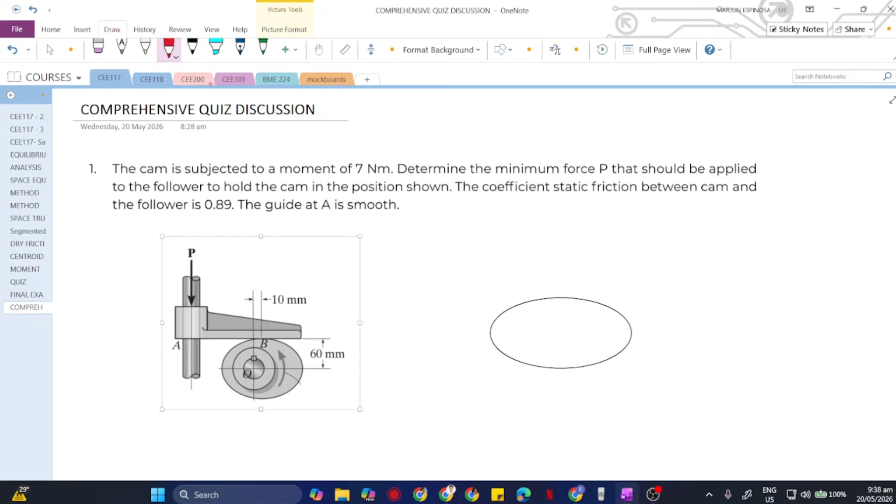So we need to solve for the value of the force P. To solve this problem, let's draw the free body diagram of the cam. So this is our rotating object, that is our cam. For example, this is our point O. Since our cam is moving in this direction, it has a moment of 7 Newton meter. So we have here our force FB, or our friction at B.

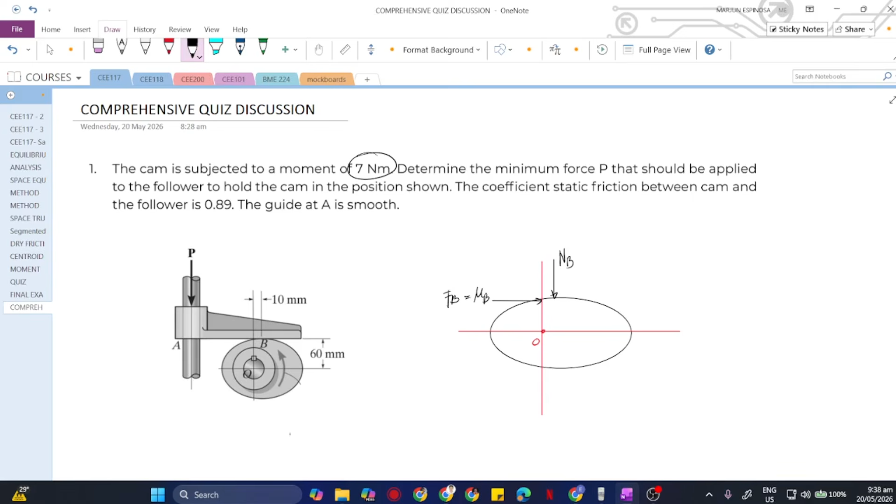Then at 10 mm, we also have our NB here. Our FB, considering we have a static coefficient of friction, that is basically mu B times NB, so that is our FB. And we also have here the 7 Newton meter.

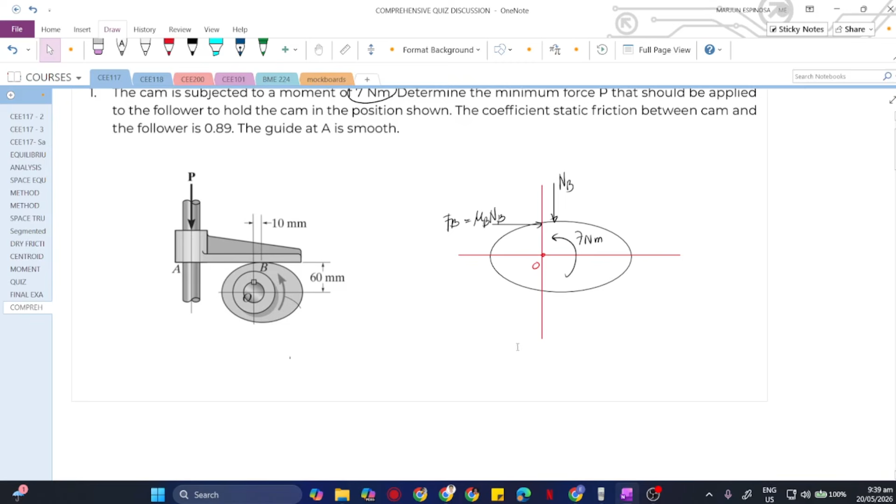So now we will take the moment at point O. We can sum up the moment at point O and equate that to 0, considering positive as counterclockwise. You can also make it clockwise if you want. So we have here 7 Newton meter.

This one right here, how much is it class? That is 10 mm. Then from here to here, that is 60 mm. So our NB will have a clockwise direction, and our FB will also have a clockwise direction, so both are negative.

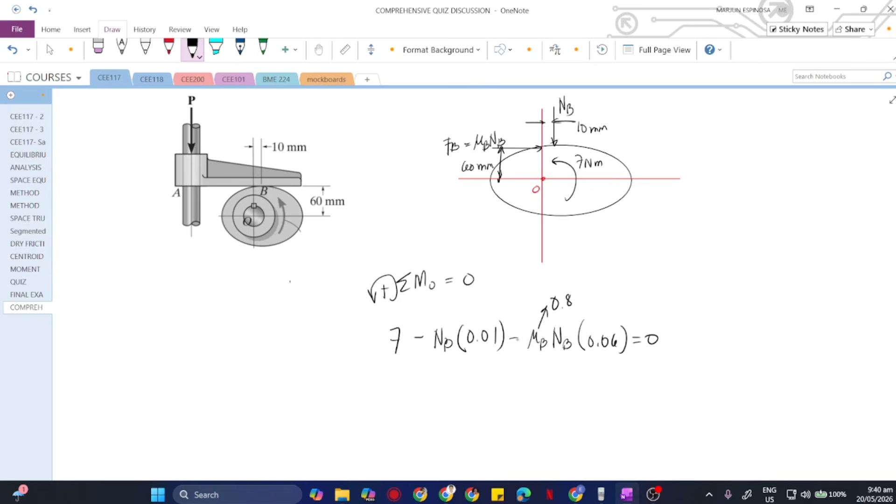Let's start with NB, that is at 10 mm, so 0.01 since this is in Newton meter. Minus our FB, which is mu B times NB, then multiply that by 0.06. Equate that to 0. Our mu B is already given as 0.89, so that's what we'll use.

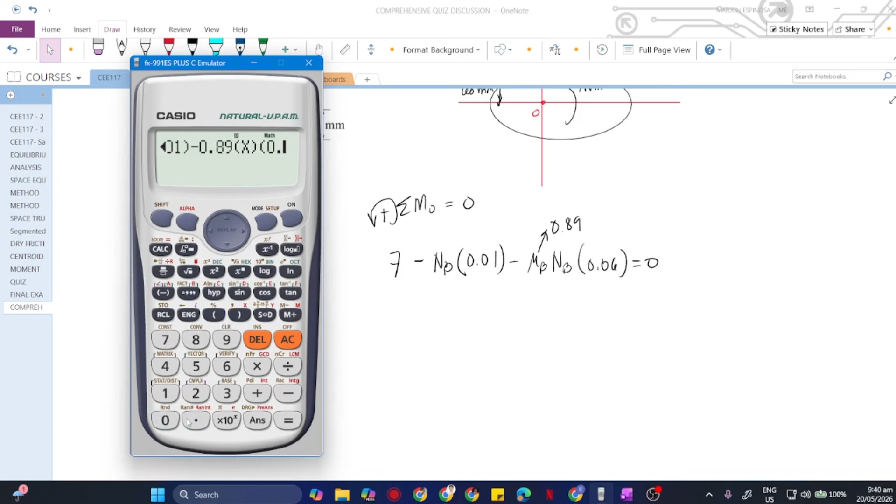Now we can get our NB. Let's use the calculator: 7 minus NB times 0.01, minus 0.89 times NB times 0.06, equal to 0. Shift solve, and we get our NB to be equivalent to 110.41 Newtons. So that is our NB, but what we need to solve is the value of our P.

If we take the free body diagram of the next component, this part right here, for example. Here is our NB, and here is our P. So we can simply use the summation of forces along Y, equate that to 0. So our P is just equivalent to our NB, which is 110.41 Newton. That is our answer for this problem.

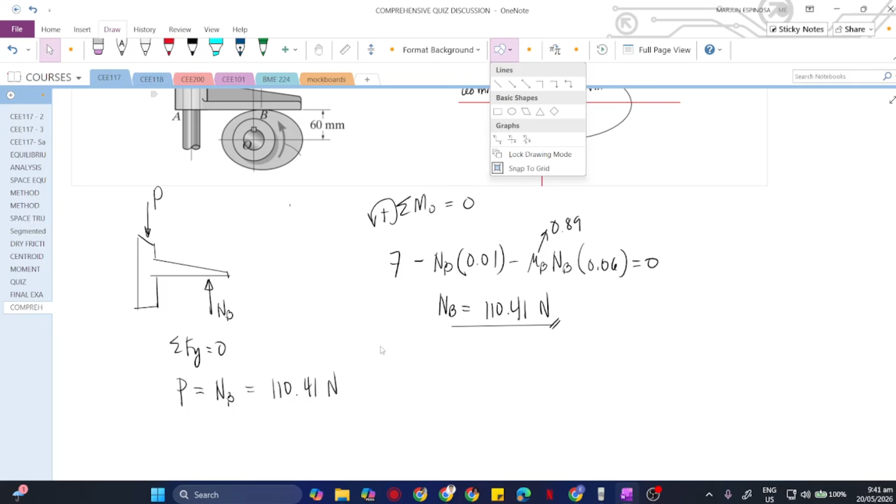Okay, that is our answer for that problem.

Now for our next problem, this one is a bit difficult. Refer to the cable below, and consider segment BC remains horizontal, and F is equivalent to 8 kN. So this part, this F here, is 8 kN. So we'll solve for the value of our P. How do we solve for that?

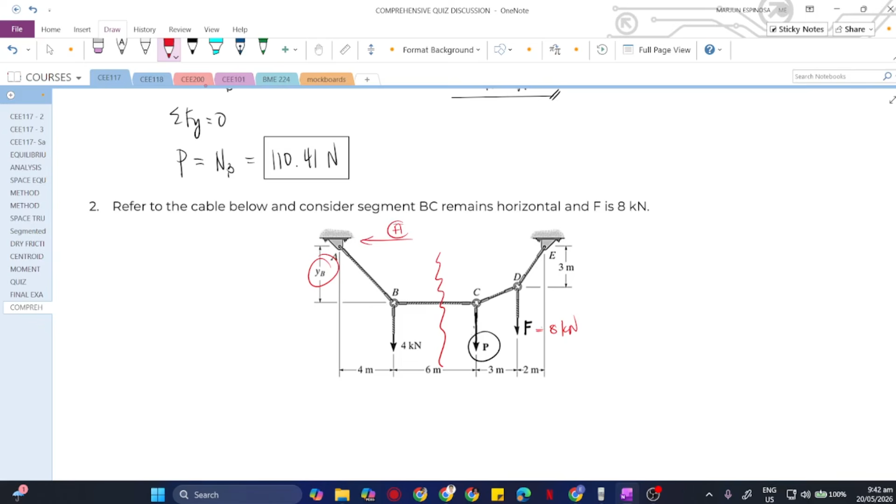We also have YB here, so later we'll try to solve that too. For our P, what we can do is cut our cable in this manner. So we have this part, let's say this is our section A, and this part here is our section B.

Now what we can do is take the individual moments. By the way, here we have AX, here we have AY, this part we have EX, and this part we also have EY. So what we'll do now is solve for the value of P.

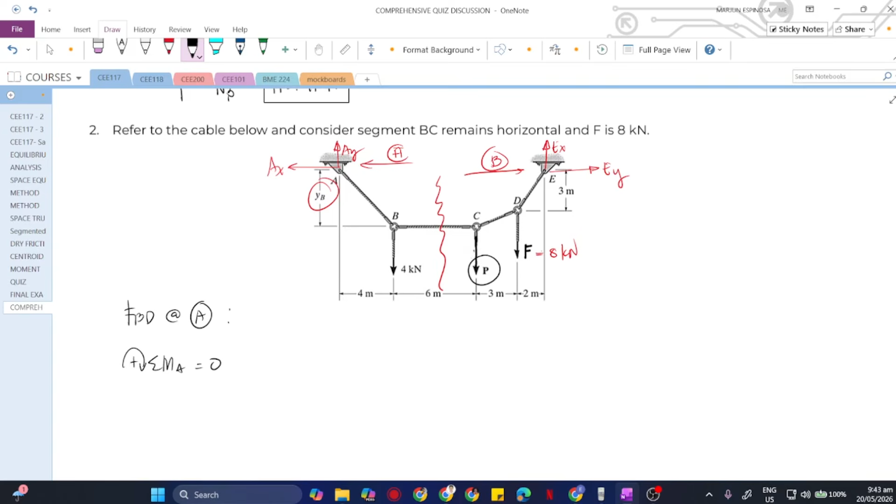To solve for the value of P, we go to the free body diagram, FBD at A. We'll sum up the moment at point A, equate that to 0. So what is the moment at A? At point B, which is 4 kilonewton. And take note class, we have BC here.

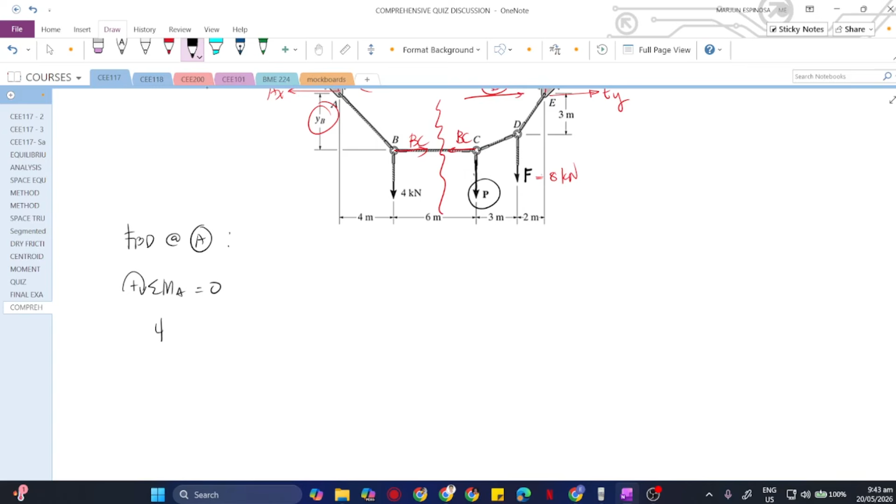And on this part too, we also have BC. So this becomes 4, and that is positive since it's clockwise, that is 4 from point A. And then we have BC.

And yung BC naman, negative. Tama, negative yung magiging direction niya, BC. And then yung perpendicular distance niya to point A is equivalent to YB. Equate that to 0. So basically, yung BC, YB natin, transpose natin sa kabila. Yung BC, YB natin is equivalent to 16. So this is our first equation.

Now, using FBD at B, what we can do is to still sum up the moment at point E. This time, sabihin natin counterclockwise is positive. Equate that to 0. Pwede lang din clockwise, no? Kasi mas convenient kung counterclockwise kasi itong E nandito na part.

So ano lang yung may moment, itong 8 kilonewton, positive yan, counterclockwise. So 8 multiplied by the distance from point E, that is 2. Also yung P na pinapahanap natin, P, and then the distance from point E, that is 5. And then you have also BC, BC will have a clockwise direction, so negative BC.

And that is equivalent to, ilan to class? Similar lang din, that is YB. Equivalent to 0. And then transpose natin ito sa kabila. Unahin na natin yan, BC, YB equivalent to 8 times 2, which is 16, plus 5P. And now, this is our second equation.

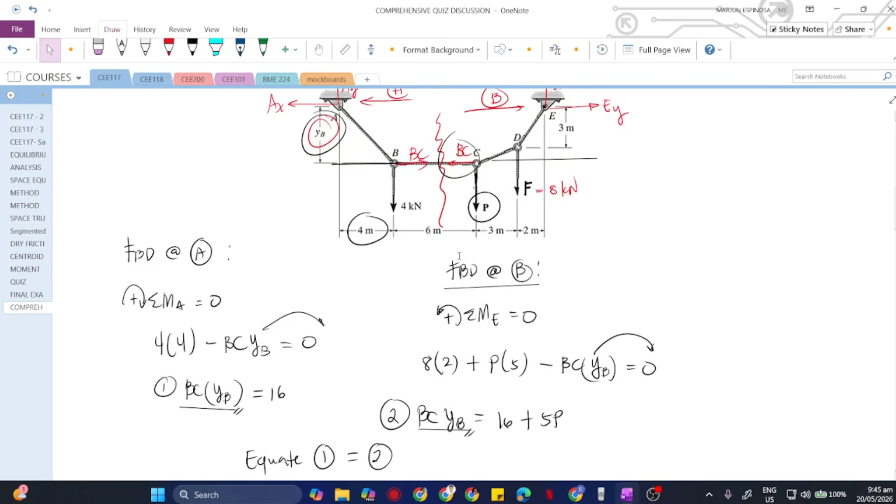Okay, kasi iniba ko yung given. Pero sa original, meron yung value ng P, ha? But that depends on the value here, yung F na binigay dito. Since nagkataon na they are just equal, so mean to say, yung P natin will have no force. That is P equals 0 kilonewton. Sabihin natin, solve natin yung, okay?

Pero ang tanong dito is determine itong P at saka yung YB, no? So solve natin itong YB na to. Okay, sandali lang class.

Okay, to solve for the value ng itong YB o sag natin dito sa point B natin class, we need to consider the entire FBD. For FBD of the entire diagram, meaning to say, itong part na to, kunin natin yung value nitong AX, AY, tsaka EX, EY.

So una, pwede natin gawin, we can sum up the moment at point A, so para yung AX, AY will have 0 moment here. Considering clockwise is positive. So ano lang yung may moment dito? 4 kilonewton, that is 4, okay, for yung perpendicular distance niya galing sa point A.

So meron din tayong considering the entire, ha. So meaning to say wala na itong BC kasi we are considering the entire diagram. So P, because 0 man yan, so 0 times 10, which is our perpendicular distance, is equivalent pa rin sa 0. So F, which is 8 kilonewton from A, that is 3 plus 6, 9 plus 4, that is 13. So 8, no, plus 8 times 13.

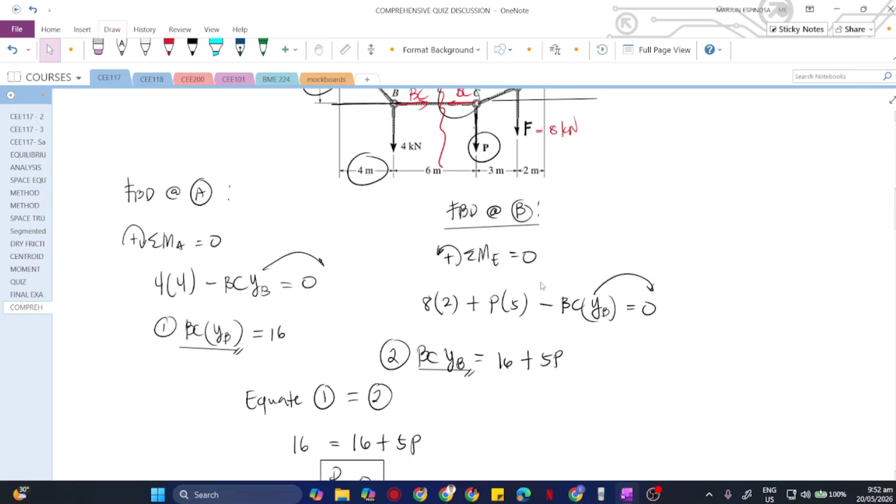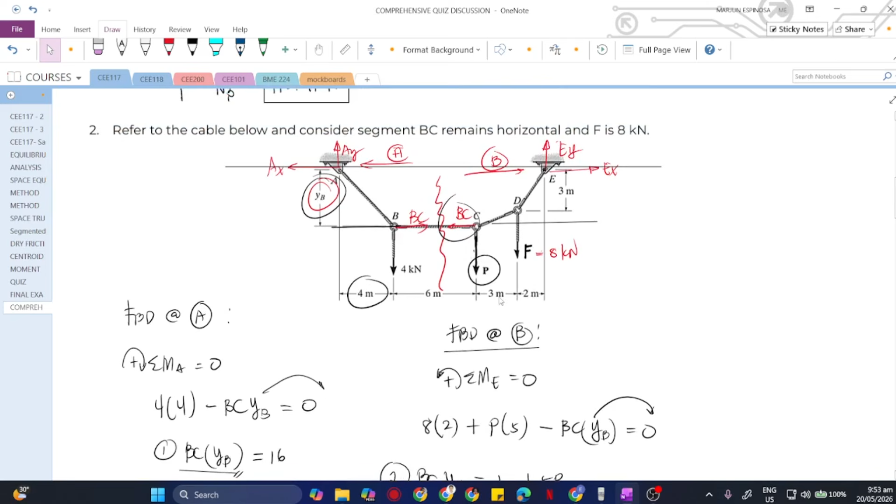And that is counterclockwise, kaya magiging negative EY. And then yung perpendicular distance niya galing sa A would be 4 plus 6, 10, 3 plus 2, 5. So 10 plus 5, that is 15. Equate that to 0.

So transpose natin to. Masasolve natin yung EY, which is equivalent to, kuha natin yung calculator natin. So that is about 4 times 4 plus 8 times 13, and that is to be divided by 15. So yung sagot dito is 8. Yung EY natin is 8 kilonewton pala. And then, summation of forces along Y for the entire FBD pa rin yan, ha.

So, meron tayong EY. Meron tayong 4 kilonewton na negative, pababa, itong part na to. So, 4 kilonewton, we also have 8 kilonewton. Itong EY pataas yan. 8, then A minus 4, minus 8. Then we have here positive AY, equivalent to 0. Ito, makansel lang yan. So therefore, yung AY natin is also equivalent to 4 kilonewton. So yan yung values ng ating EY at saka AY.

And then, solve natin yung value naman ng EX at saka AX. So pwede natin gawin, punta tayo sa joint E. We will consider joint E. So ano yun sa joint E dyan?

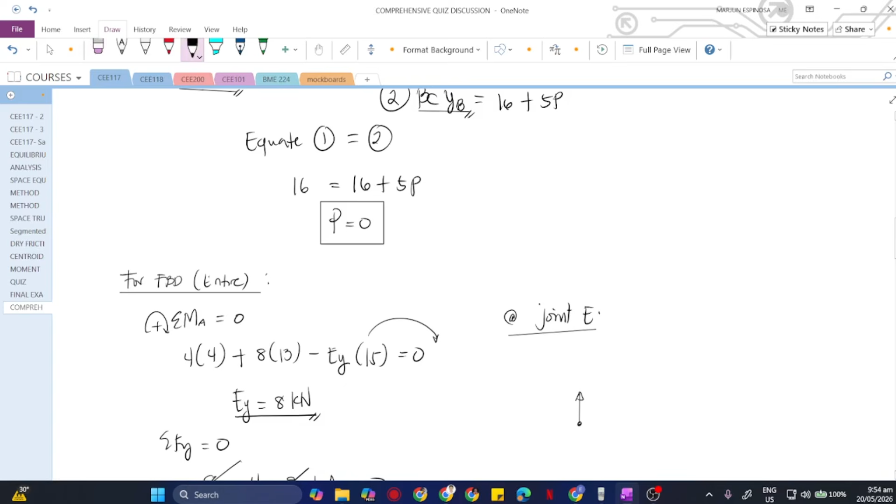Meron tayong EY, which is equivalent to 8 kilonewtons. So ito, EX, yung kinukuha natin dito. And meron din tayo ditong DE or ED, pwede lang DE. And also itong angle na to. Gawa tayo ng line, itong angle na to class. Angle, sabihin natin DE. Okay, ano yung angle DE na yan?

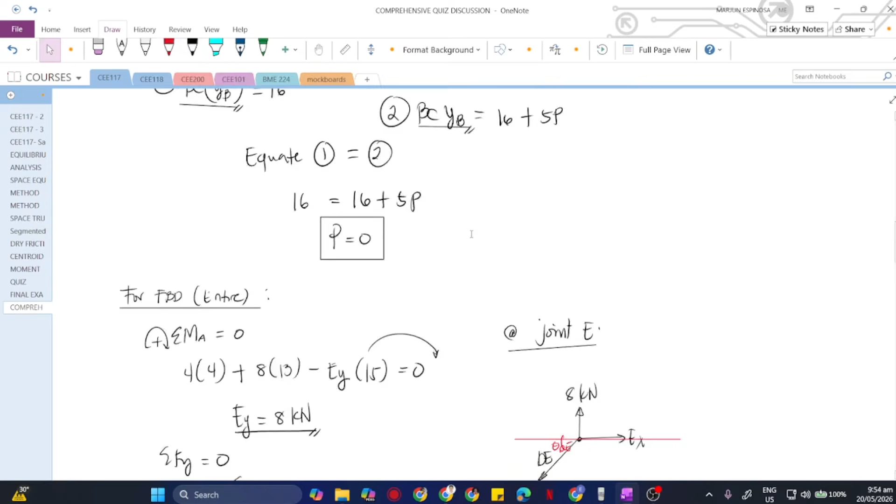So meron tayo ditong parang triangle, no? Ganito, so kunin natin itong angle na to. Considering this one is 2 meters, itong part na to 2 meters, and itong part na to is 3 meters. So makukuha natin yung angle natin. Yung angle DE natin equivalent to arctan of, yung opposite side niya is 3 all over 2. Yung opposite is 3, yung adjacent is 2. So makukuha natin yung angle theta of angle ED, that is inverse tan 3 over 2, or that is equivalent to 56.31. So yung angle DE natin is 56.31 degrees. Yan yung angle ED natin, or DE.

Now, since nakuha naman natin to, which is 56.31, makukuha na natin yung EX. So how to solve for that one? We can use summation of forces along Y, equate that to 0. Unahin natin yung Y. So we have here 8 kilonewtons minus DE, and that is sine of 56.31, equate that to 0. Transpose natin to, therefore we get DE sine of 56.31 equivalent to 8.

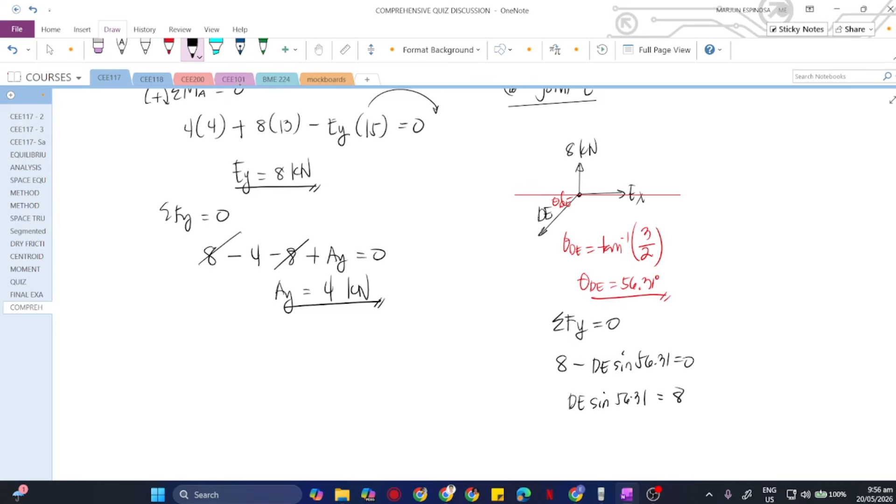Or simply we can divide by sine so we can solve for the value of DE. So ano yung value natin? 8 over sine of 56.31, and that would give us 9.61. DE is 9.61 kilonewton. Yan yung DE natin.

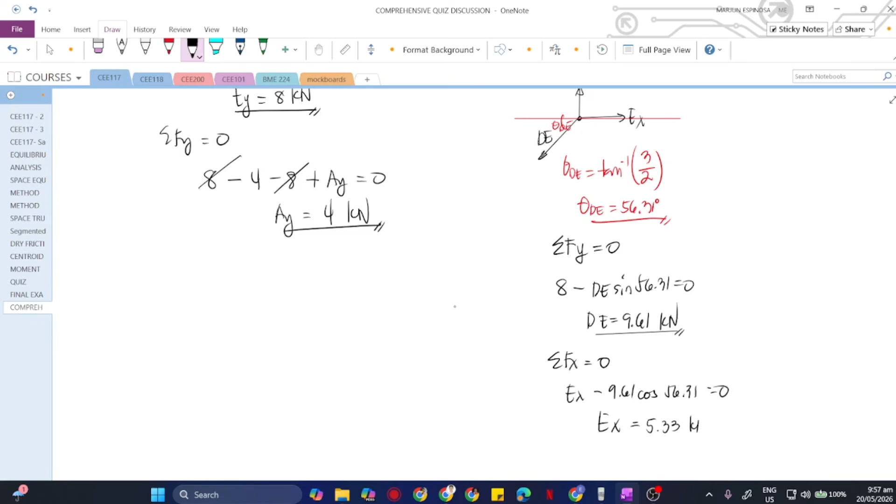Now, summation of forces along X, equate that to 0. Meron tayong EX minus ito, 9.61 our DE, then cosine of 56.31 equivalent to 0. Yung EX pala natin is equivalent to 9.61 cosine of 56.31, and that would give us 5.33. 5.33 kilonewton, yan yung EX natin. And then based on our diagram, yung EX natin at AX natin is just equal. Summation of forces along X for the entire diagram class, AX is equivalent to EX. So therefore, yung AX natin is also 5.33 kilonewton. Yan yung AX natin.

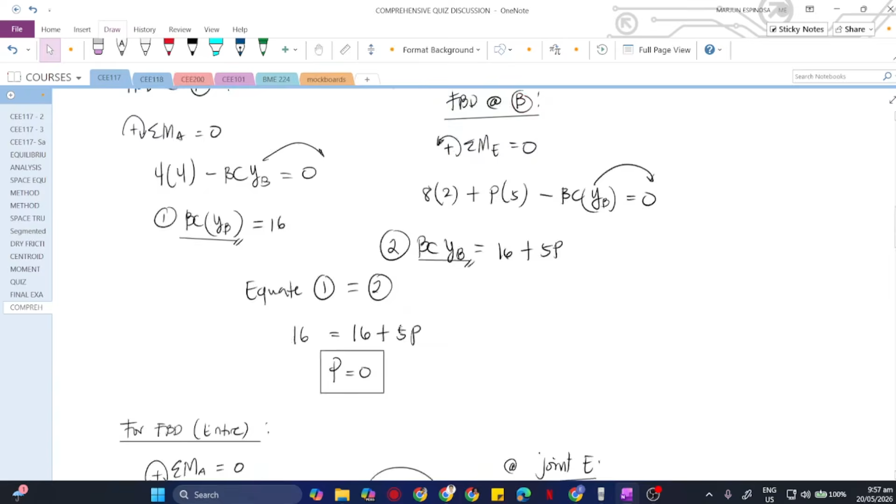Now since nakuha na natin yung AX natin, then meron na tayong AY, EX, then masasolve na natin yung YB natin. If we were be able to solve itong, need natin kukunin yung... sandali. Pwede natin gawin is gamitin natin tong to solve for YB.

Pwede natin gamitin tong section A. Tingnan natin, kung gagamitin natin itong part na to, section A, meron tayong AY, AX, meron tayong BX at saka 4. Unknown yung BX, pero based on this one, ay BX yung BC, masasolve natin yung BC to be equivalent to AX lang, based on this given. So yung AX at BX ay BC is just equal. Tama ba? Kasi summation of forces along X, BC minus AX, ang summation of forces along Y, AY tsaka 4 kilonewton. So yung BC pala natin is just equivalent to AX lang.

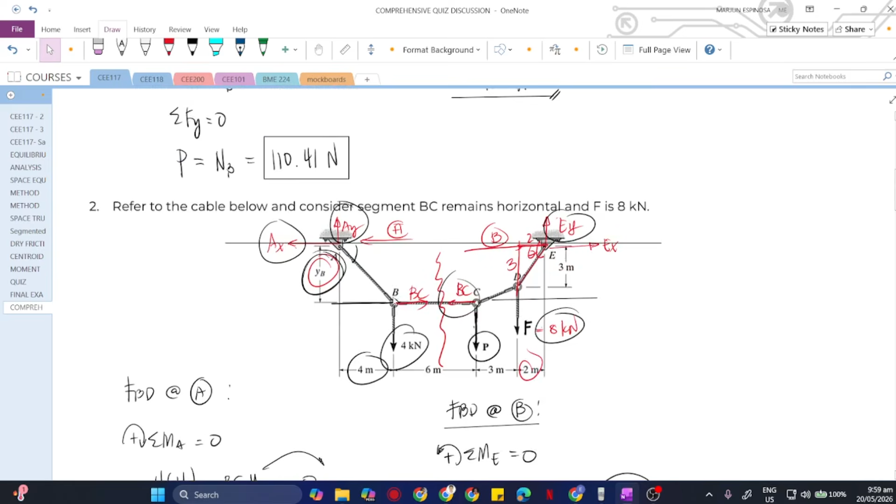Okay, so using FBD at A, summation of forces along X equate that to 0. So yung AX natin is equivalent lang sa BC. So BC pala natin is 5.33 kilonewton also. So yan yung gagamitin natin. So we will just be evaluating itong joint B.

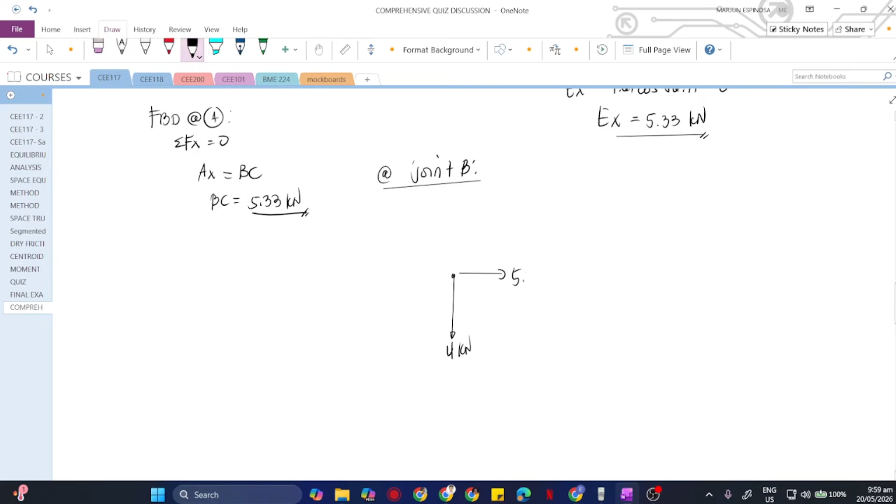At joint B, meron tayo ditong 4 kilonewton. So meron tayong joint B dito. So this is 4 kilonewton. Ito naman nakuha natin, which is 5.33. And then lastly is itong AB natin or BA. Ito yung BA natin.

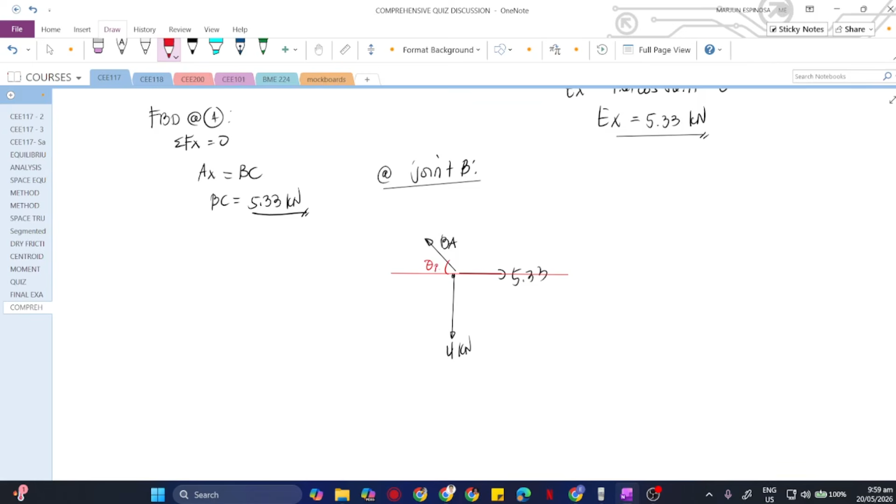At yung angle natin dyan, hindi natin yan alam. Hindi natin alam yung angle dito. Angle, sabihin natin BA. So we need to solve for angle BA para gamitin natin yung angle BA to solve for our YB. Kasi kung makuha natin yung angle AB natin, this one is equivalent to 4 based on our given. Ito, 4. Then makukuha na natin yung YB natin by using the tangent function. So, kukunin mo natin tong YB, angle AB natin. So we can just use the summation of forces along, let's say for example, X, equate that to 0. Or, unahin natin yung Y, equate that to 0.

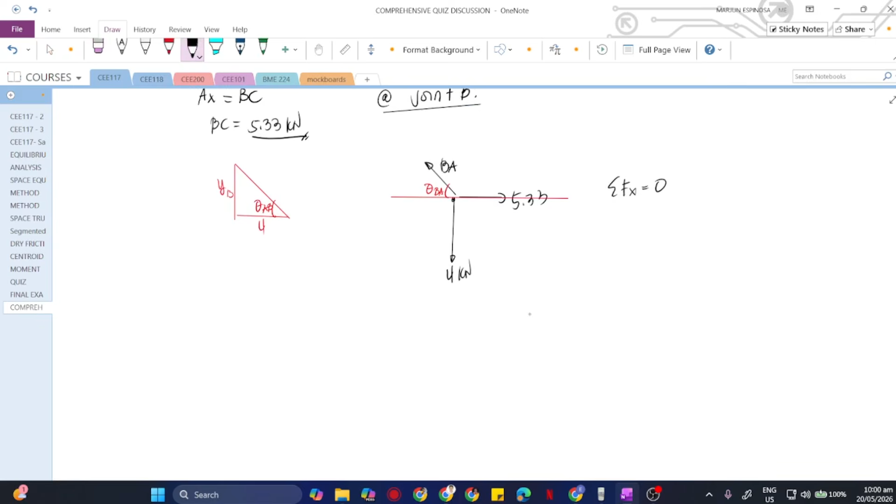So, BA, then that is sine of angle BA, minus 4, equate that to 0. Transpose the negative 4, it becomes positive 4. So this is our first equation.

Then summation of forces along X, equate that to 0. So let's start with 5.33 minus BA cosine of angle BA, equate that to 0. Transpose the negative BA, so it becomes positive BA cosine angle BA equivalent to 5.33. So this is our second equation.

Now by dividing the first equation by the second equation, we get BA sine angle BA equivalent to 4, all over BA cosine angle BA equivalent to 5.33. So the BA here will cancel out, and sin theta over cosine theta will be equivalent to tangent theta.

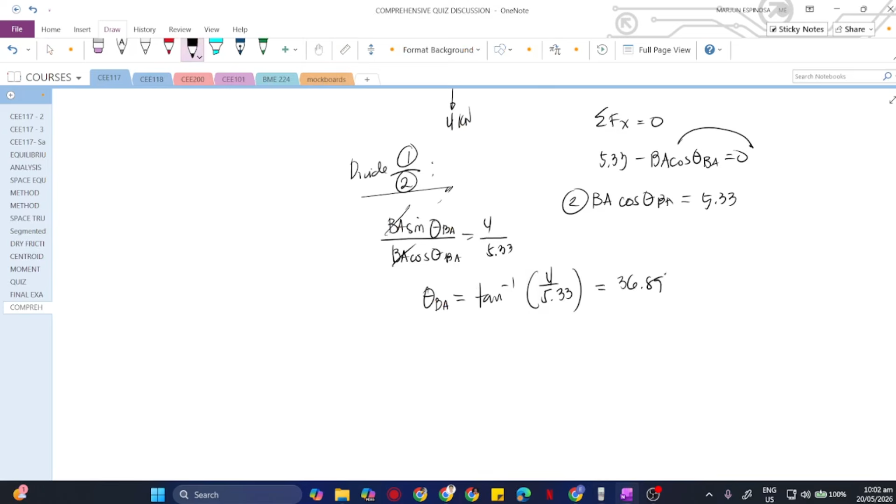Then angle BA will now be equivalent to arctan of 4 over 5.33. So we can get our angle BA. Arctan of 4 over 5.33, the answer is equivalent to 36.89. So that is our angle BA.

So once we get angle BA, we can now solve for our YB. Basically, tan of 36.89 is equivalent to the opposite, YB, over adjacent 4. So YB is equivalent to 4 tangent 36.89, which is simply 4 times tan of our answer, and that gives us approximately 3.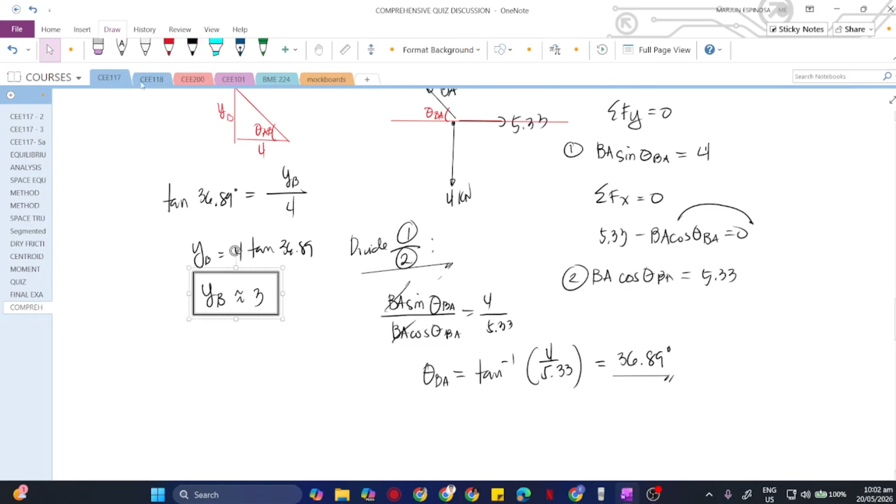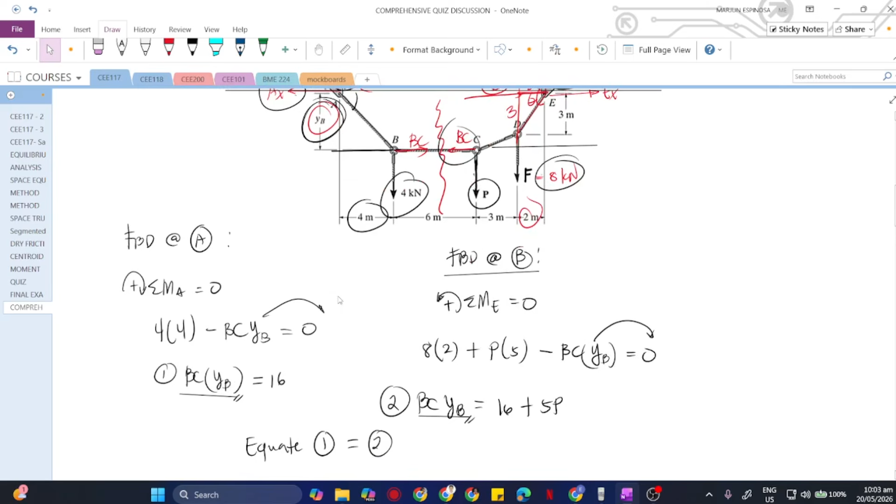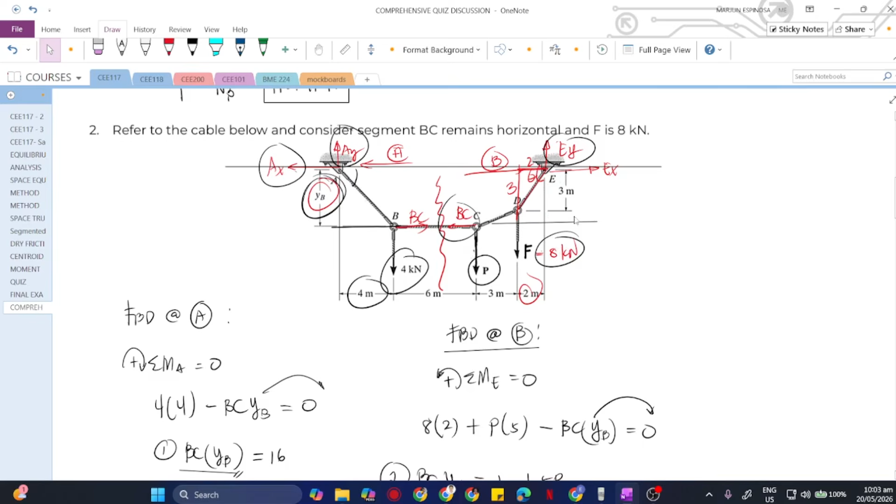So that's our answer for this problem. But it's not exactly 3, just approximately 3 based on the value we got, which is 3.001. So that's our answer for this problem. It just happens that it's similar here because we said F is equivalent to 8 kN, so the diagram turns out similar. But in case it's not 8 kN, there's a value of P, and then YB and this part would differ. But based on our example, we get similar values.

Now, for our third problem, let me check if I'm still recording. Okay, still recording. For our next problem, determine the moment of inertia of the cross-sectional area with respect to the x and y-axis. So we need to get I sub x and I sub y, which are the moments of inertia.

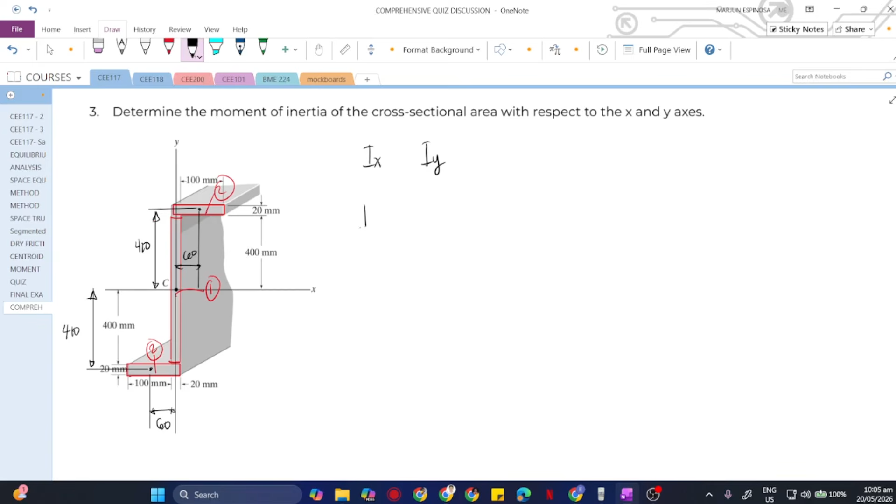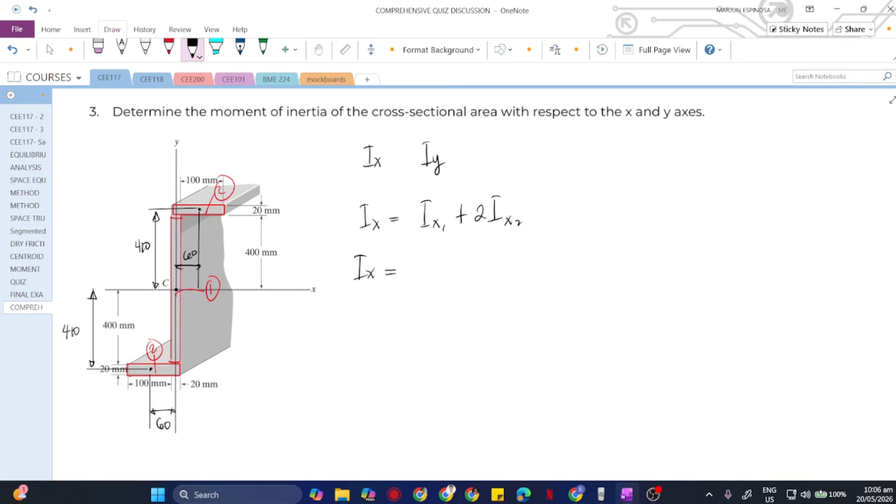Now let's start with I sub x. So I sub x is the summation of the moment of inertia of the first segment, plus the moment of inertia of the second segment. Since there are two of that segment, we multiply it by 2. So for the first segment, since the x and y axis is right at its centroid, the I sub x for a rectangle is just 1/12 bh cubed. We don't need the parallel axis theorem there since our centroid and the axis we're taking the moment about coincide. So that's just I sub x sub 1.

Now for I sub x sub 2, we'll use the parallel axis theorem. First, that's 1/12, class, 1/12.

1 over 12 BH cube - make sure you memorize the rectangle, the most simple and commonly used figure. Although the triangle and circle should also be memorized. 1 over 12 BH cube, this is 2.

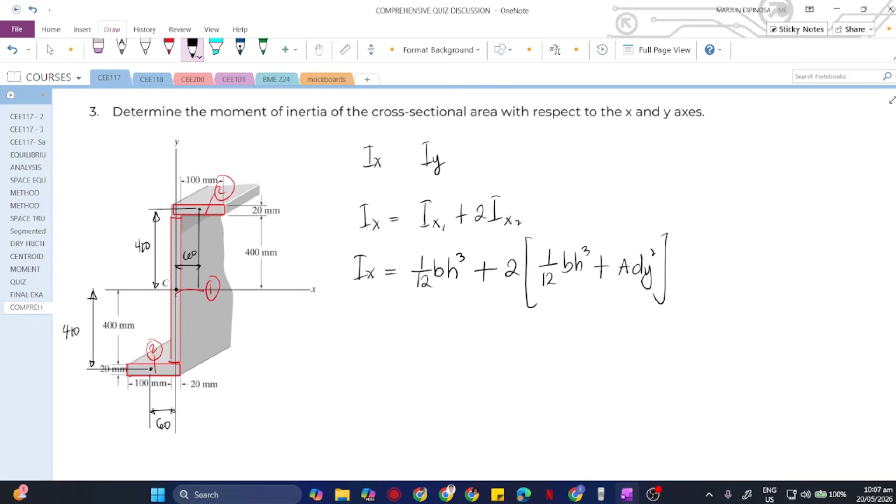Then for I sub x sub 2, I sub x is still similar, 1 over 12 BH cube. But we'll use the parallel axis theorem because the segment's centroid doesn't coincide with our moment axis x and y. So we need to add area times dy squared. Similar for I sub y later.

Now let's solve. Use base 1 height 1, since these are different - base 2 height 2, different values, class. So 1 over 12, the base for the first segment is 20 mm. The height, from here to here, is 400 plus 400, so that's 800 cubed.

Plus twice of 1 over 12, using base 2 for the second segment. If this is 100, and the thickness is 20, then 100 plus 20 equals 120. And the height is 20. Plus, the area of segment 2 is 20 by 120, or similarly 120 by 20.

And the perpendicular distance, that is dy. So this part is 410, squared. That's why dimensions are important - perpendicular distance with respect to our axis of rotation. So I sub x would be equivalent to... all these are in mm, so mm raised to the power of 4.

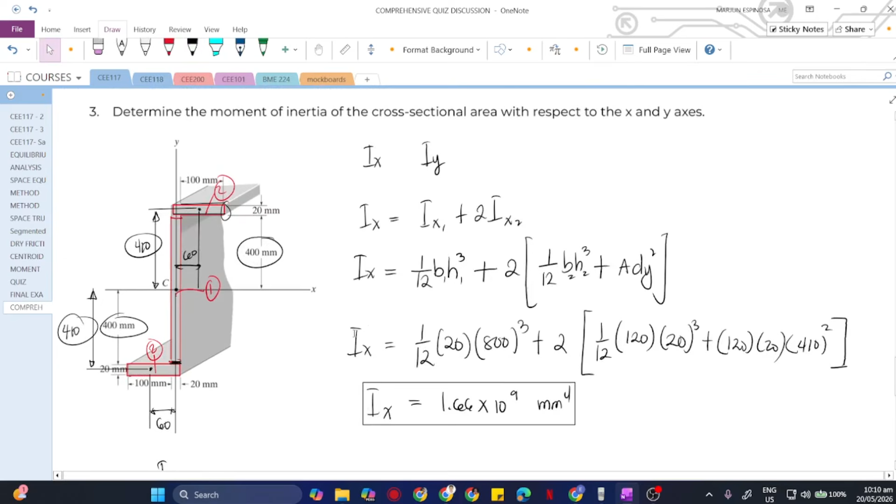That's our answer for I sub x - the moment of inertia about the x-axis. Now for the moment of inertia about the y-axis: segment 1 still, I sub y sub 1 plus twice of I sub y sub 2, since there are two of this second segment.

For I sub y sub 1, similarly the x and y axis is at the centroid itself. So we use 1 over 12, the base cubed this time, times the height - for y-axis, unlike for x where the height is cubed. Plus twice, similarly we use 1 over 12, just changing the positioning of which is cubed - this time exponent on segment 2.

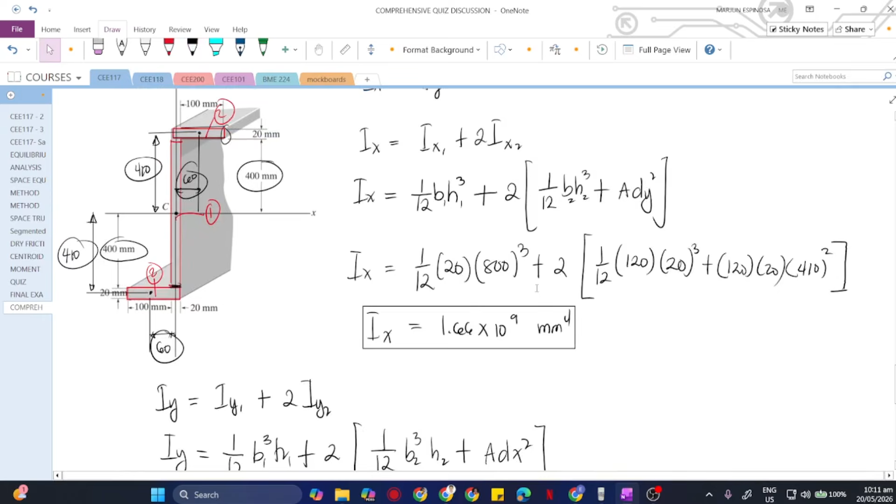So I sub y equivalent to 1 over 12 times base 1, similar to base 1 before which is 20, but this time cubed. And height 1 is still 800. Plus 2 of 1 over 12.

Base 2 is 120, this time cubed. Height 2 is 20, not cubed this time. Plus, similarly the area, 120 times 20. And this time dx squared is now equivalent to 60 squared. That's all that changes.

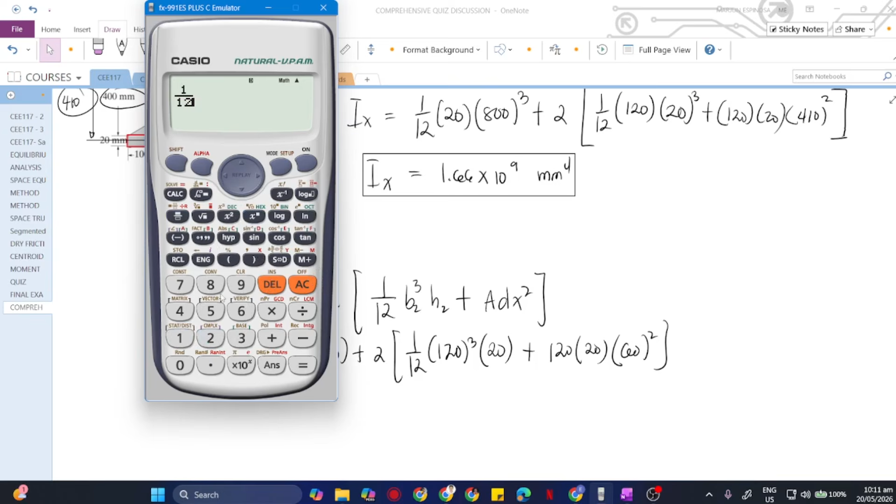Let's change the positioning so this becomes cubed. Okay class, let's check. 1 over 12 times 20 cubed, times 800, plus 2 times 1 over 12, and we have here 120 cubed.

And then we have here 20, plus 120 times 20 times 60 squared. The answer here will be equivalent to this one. So let's adjust so we have exponent 9. Shift pa rin. So I sub y will be equivalent to 0.24, let's say 0.024 times 10 raised to the power of 9 mm raised to the power of 4. So that's our answer for this problem.

So for our last problem, determine the moment of inertia for the shaded area about the x-axis. So if that's our problem class, we need to solve for the moment of inertia about the x-axis.

The formula we'll use is the integral I gave. I sub x, the moment of inertia about the x-axis, will be equivalent to the integral of y squared dA. This is the property, this is the technique to solve for the moment of inertia, if about the x-axis, for example about this axis.

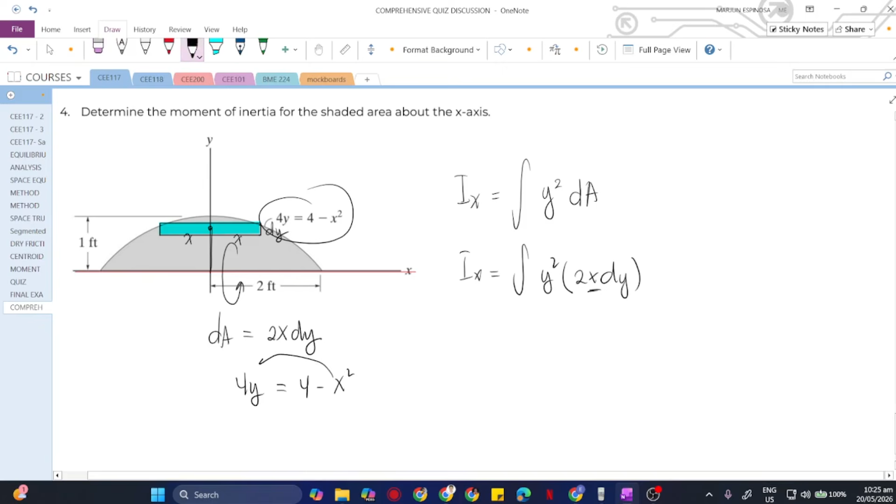So now let's take the square root of that, giving x equals - this 4, we can actually factor that out, leaving 1 minus y. Then square root of that - square root of 4 is 2, square root of 1 minus y stays as 1 minus y. So that's the value we'll use for x.

So I sub x will be equivalent to - since we're in dy, our limits are from y1 to y2. Our y1 is obviously 0, going up to 1. So from 0 to 1, y squared, then we have 2, and our x is 2 square root of 1 minus y, times dy.

So the rest of the process is to solve using our calculator. Y squared - since there's no y squared there, it stays as is. So let's treat y as x, times 2, then make this into an exponent, 1 minus x, raised to the power of 1/2 or square root, right. And that's evaluated from 0 to 1.

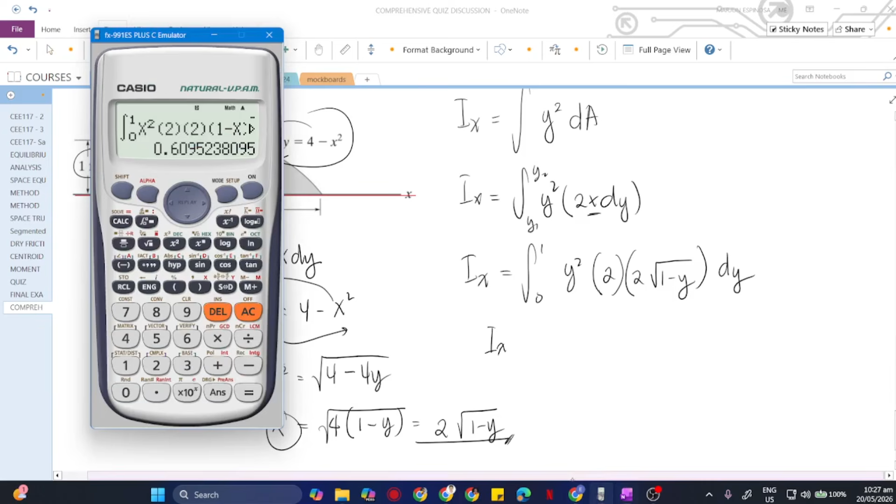So let's just wait a bit since we have a radical or fractional exponent. Wait a moment, class. So our answer here for I sub x is equivalent to 0.61, raised to the power of 4. So that's our answer for this problem.